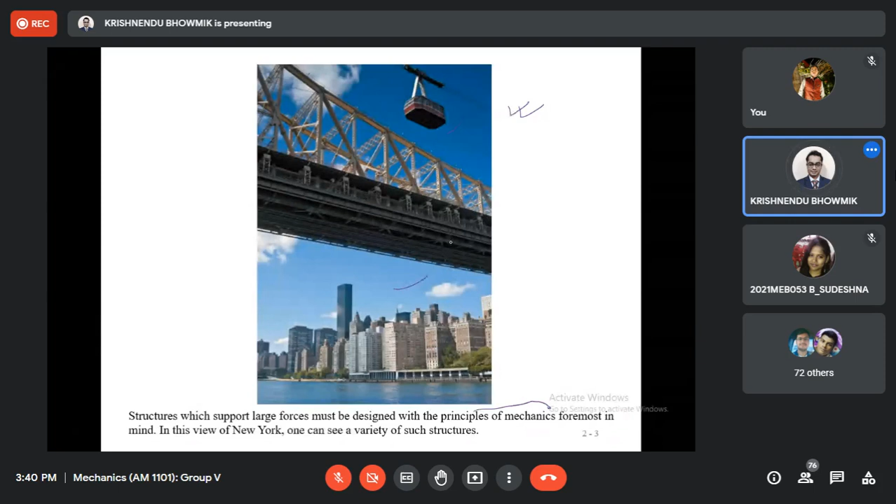So we are going to start day 1 lectures starting from statics. When we are talking about structures, this is one example of the structures. You can see this is based on a principle of mechanics, and this is one view of New York City, having various types of structural components. Okay, so lecture 1 starts with force, moments, and equilibrium. Okay, what is mechanics?

So to start with, in brief, mechanics is the science which describes and predicts the conditions of rest or motion of bodies. So there are two things: one is at rest and one is in motion. That will happen due to the action of forces. So mechanics can be briefly classified into rigid bodies, having two parts, statics and dynamics. That indicates this engineering mechanics is nothing but rigid body mechanics, and it has two parts: statics, the particle is at rest, and dynamics, the particle is in motion.

Then it might be deformable bodies. Another name could be solid mechanics; some people call it strength of materials. And then it might have fluid mechanics. Three main parts: rigid body, deformable body, and fluid mechanics. Or people say engineering mechanics, mechanics of solids or strength of materials, and fluid mechanics. And this mechanics is the foundation of most engineering sciences, and it is an indispensable prerequisite to their studies. Okay.

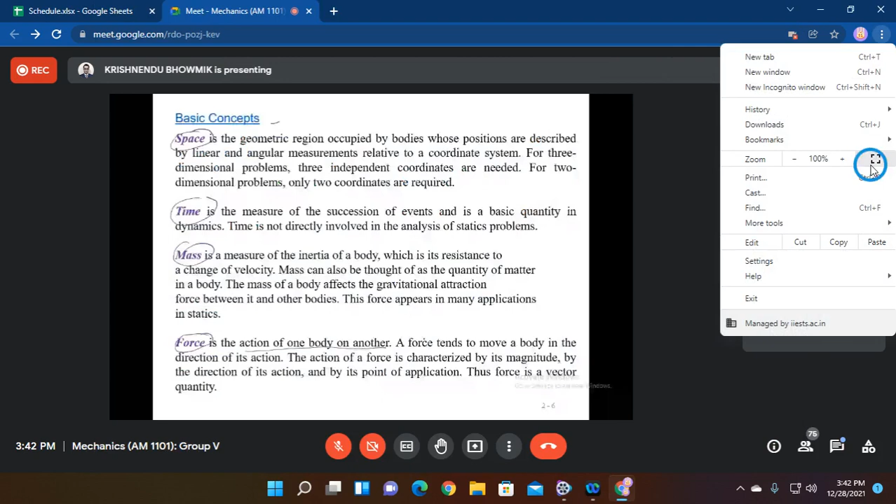Now, in basic concepts, we have space. You know what is space? Time, then mass, then the last one is force. Mainly, we will cover this portion, force, in this study. Force is the action of one body on another. Okay. And force is trying to move the body in the direction of its action. It tries, but whether it is capable or not depends upon the structure on which you are applying the force.

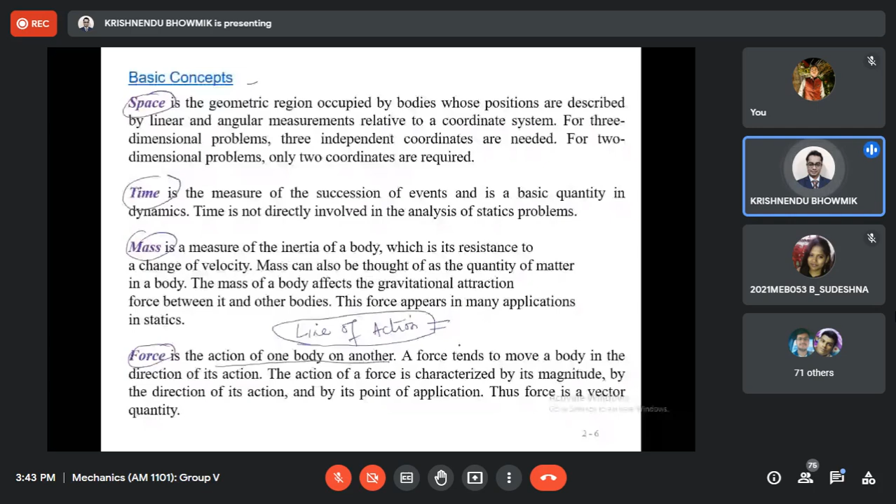So one important thing for force is what we call line of action. Force basically we apply through the line of action. Through the line of action. This is the most important word. Force has been applied through the line of action. Okay, and of course force has magnitude and direction, so we call it a vector quantity. Now next is when we are considering a particle. A particle is a body of negligible dimensions.

Yesterday we were talking about points, like it is having negligible dimensions. Different ways we can think about the points. Next is rigid body. A rigid body is where you are applying some forces on a body, but the body does not have any deformation. No strain developed in the body due to the application of the load. That is called the rigid body.

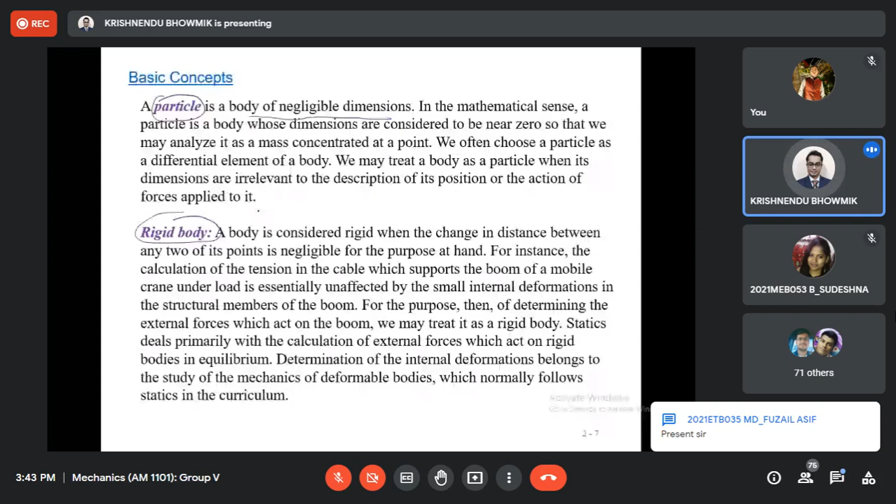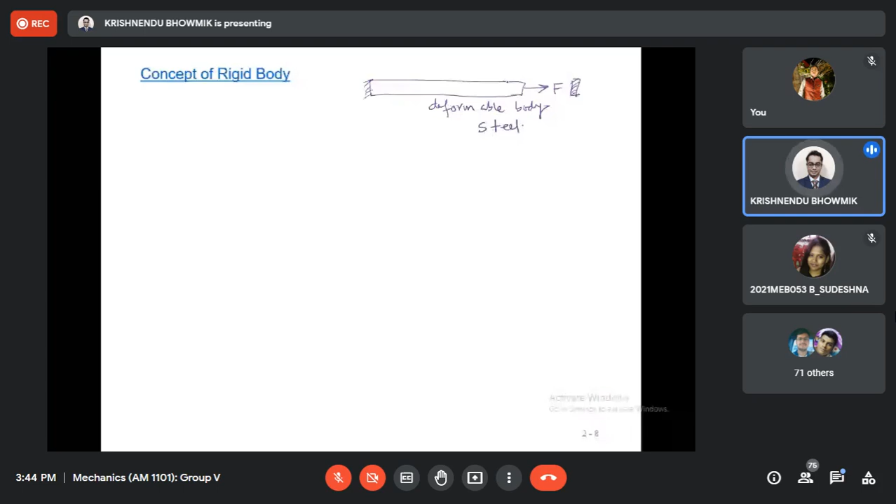So the concept of rigid body, maybe I'll give you very simple examples. Say I have one bar like this. I am applying some force here, say force F. This is the cross section, rectangular cross section. So consider this is a deformable body. Say for example, it is made of steel, like a scale kind of thing, metallic, made of stainless steel. We call it SS. Mild steel we call MS.

Now, due to the application of load, what we can expect: the length will elongate. I'm exaggerating the value. The elongated length is delta. Deformation, and also the cross section, like width, will decrease a little bit. So as a whole, the cross section is supposed to reduce. Maybe I'll draw this way. Cross section reduced.

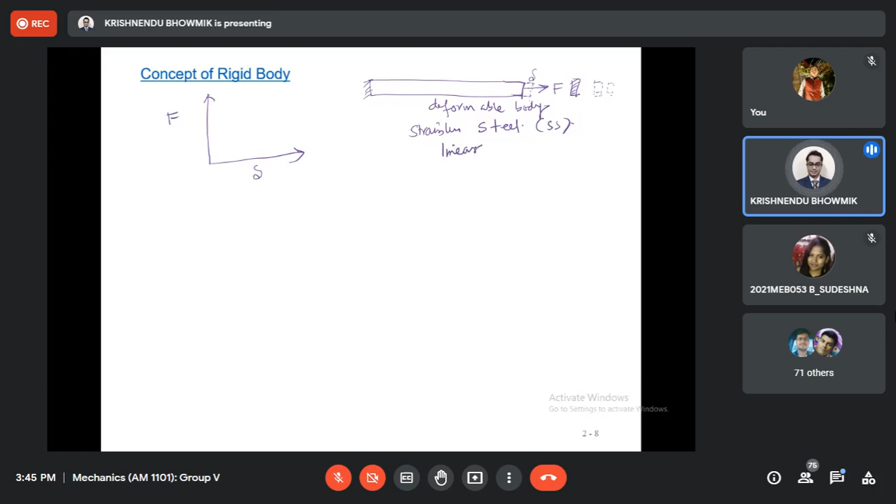Now I am interested to draw load F versus displacement, and I am considering the load is not much higher, and the response is linear. Now I have one open-ended question to all of you. It is just like y equals mx, correct? C equals 0, m is the slope. So m is nothing but tan theta. I am writing this as theta. Now, can you tell me what this slope represents? We always use it in engineering. What is this slope called?

Slope of the load-displacement curve. Gradient. Sir, differentiation. Very good. So like del F by del delta, the instant slope. Somebody can write it as dF by d delta also. Very good, one option. Any other option? Delta F by delta delta. Very good. Anything else? So tan theta is equal to F by delta. Very good.

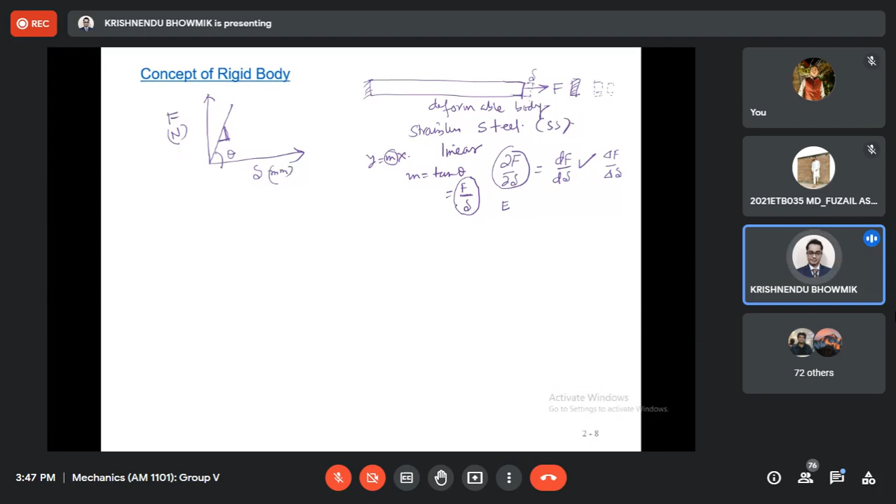F by delta. Now tell me, what do we term this F by delta? Stress. Young's modulus. Young's modulus, denoted by E. Okay. Anything else? Now tell me, this is in Newton and this is in millimeter. So this unit is basically Newton per millimeter. What is the unit of Young's modulus, if it is the Newton and millimeter system?

Newton per millimeter square. We call it MPa, megapascal, actually 10 to the power 6 Newton per meter square. Newton per meter square is Pascal, so we call it megapascal, MPa. But this unit and this unit are not matching, correct? So this slope cannot be Young's modulus. Anything else? Modulus of rigidity. What is the unit of that? That is also the unit of stress, 10 to the power 6 Pascal. But this is Newton per millimeter.

I am redefining this: force required to produce unit displacement. Sir, force constant. So where did you hear this name, force constant? In spring. Very good. So Hooke's law. Stiffness, K, spring constant. Somebody called it stiffness. Very good, I will use this word, stiffness. K is stiffness. Apart from the Young's modulus concept, everybody is correct.

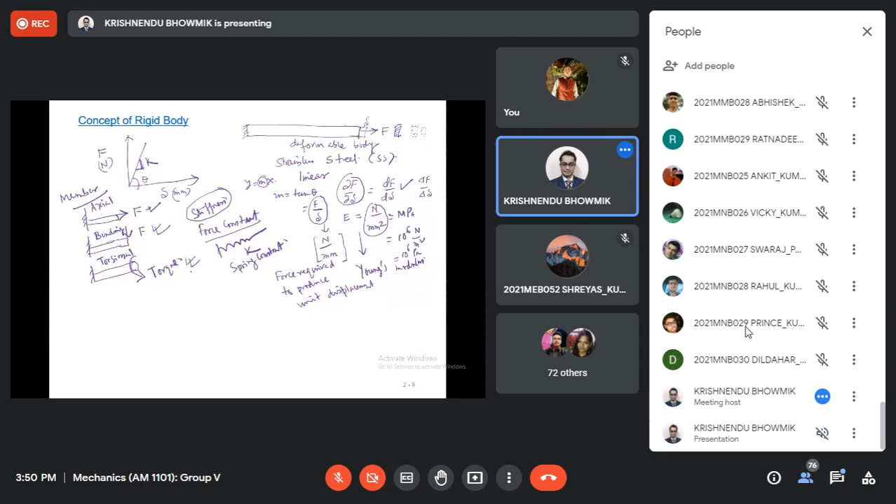Understood? I did the experiment and got this. Now the next idea is, here this cross section is A and maybe the initial length was L. So we are getting one strain, this is strain epsilon, that's it, delta by L. And stress sigma.

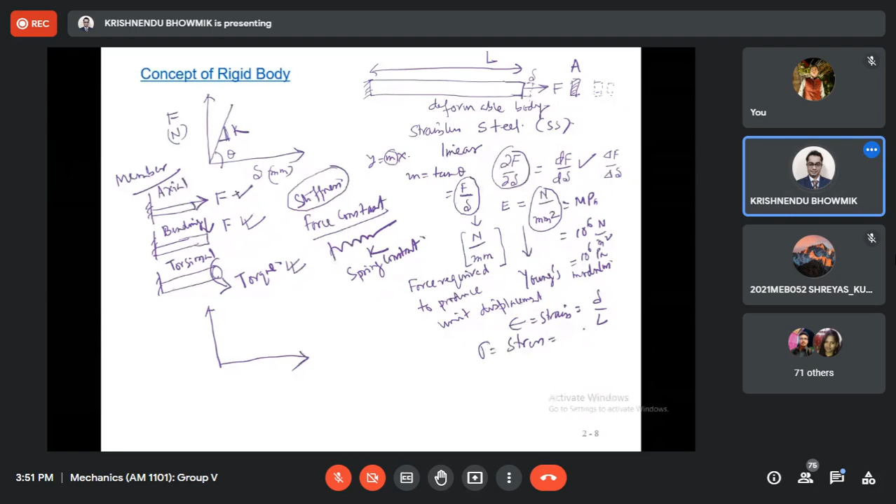A little bit updated version I am telling, but it is very interesting. Stress will be F by A. Now I am dividing F by A and delta by L, sigma and epsilon, so I am getting another graph like this.

What I did, whatever value I have from the experiment, what are we measuring? We are measuring load and displacement only, correct? Now if I divide this force by the original area, we call it the engineering stress strain curve. This is stress and this is displacement divided by length, so I am getting this curve.

Now tell me, which is this slope called? Young's modulus. Right, very good, you are correct. So basically in the experiment we are doing this, and if I apply the force, but we never put force on the horizontal axis, we plot force on the vertical. This is the force displacement concept of stiffness, actually the concept of stiffness and concept of Young's modulus.

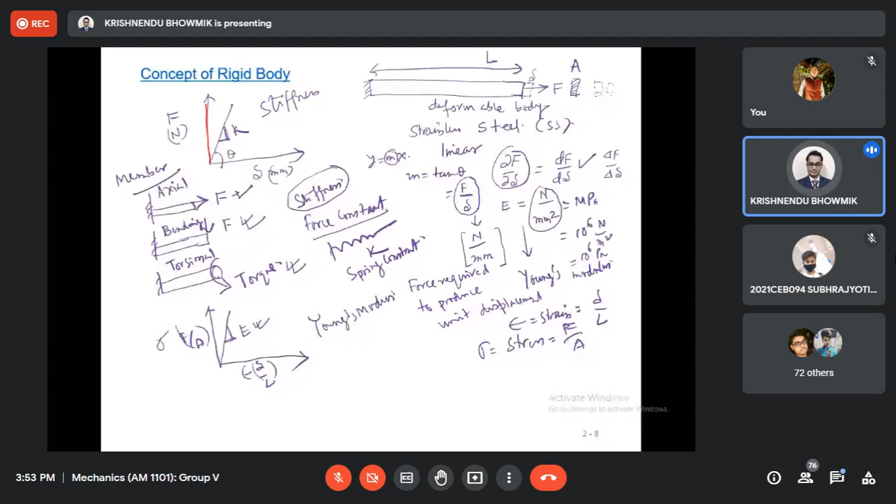Now, very interesting thing. So I am applying one load, but due to the application of the load, there is no deformation at all. If there is no deformation, but load we are applying, the curve is supposed to go like this, is it not? We are applying load, but no displacement, no deformation, then your curve should go vertically, correct? Strain also will be zero, it's supposed to go vertically, it should go vertically in that case.

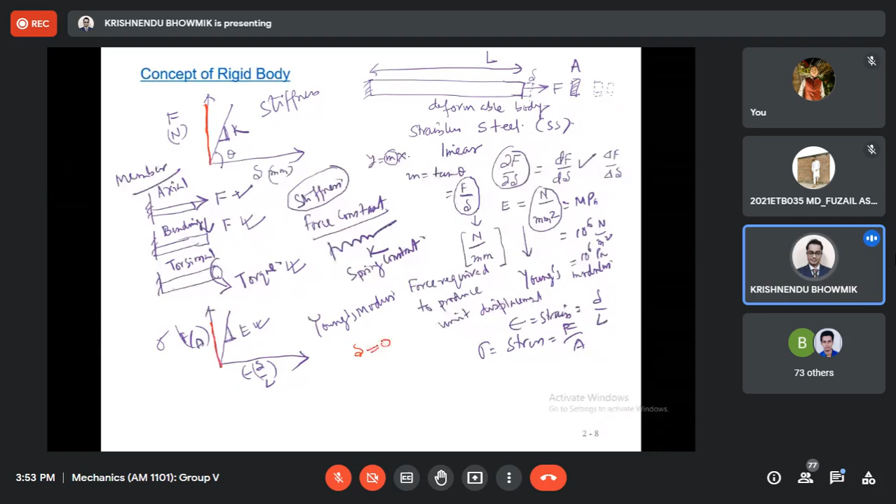When this displacement is always zero, no displacement, strain is zero, then the curve is vertical. That scenario means K is infinity or E is infinity, and that is called rigid body. You are applying some load, but there is no deformation at all in the body, or there is no strain at all, so it will go to the rigid body concept.

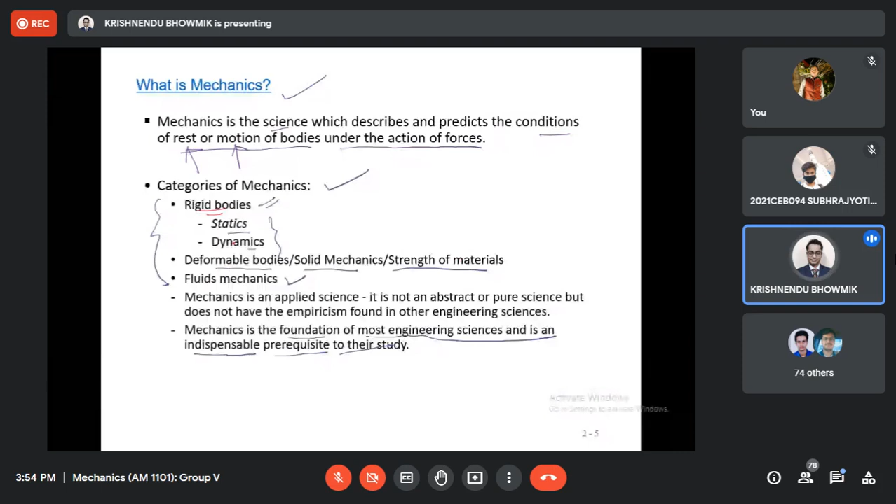Understood? The concept of rigid body has come from this. Yes, we have simplified the problem here. In mechanics, we will be doing the rigid body analysis, we will consider the body as rigid, so no deformation at all. But when it is deformable, we will go for mechanics of solids, or solid mechanics, strength of materials—same subject, different names. So that way we have defined the rigid body concept.

Now, last time I told you that elementary mechanics is mainly governed by 6 fundamental principles. So one is the parallelogram law of addition of forces—of course subtraction will also be included here.

Then the principle of transmissibility. Say it is a rigid body and this is the line of action. Now whether you are applying load here or here or here, if you are not changing the line of action, the effect of the application of the load on the rigid body will be the same. There will be no change at all in how the body will experience it. That formula is known as the principle of transmissibility. We can translate the force, or we can change the point of application of the load along the line of action. So that's why line of action is the key word here—we call it the principle of transmissibility.

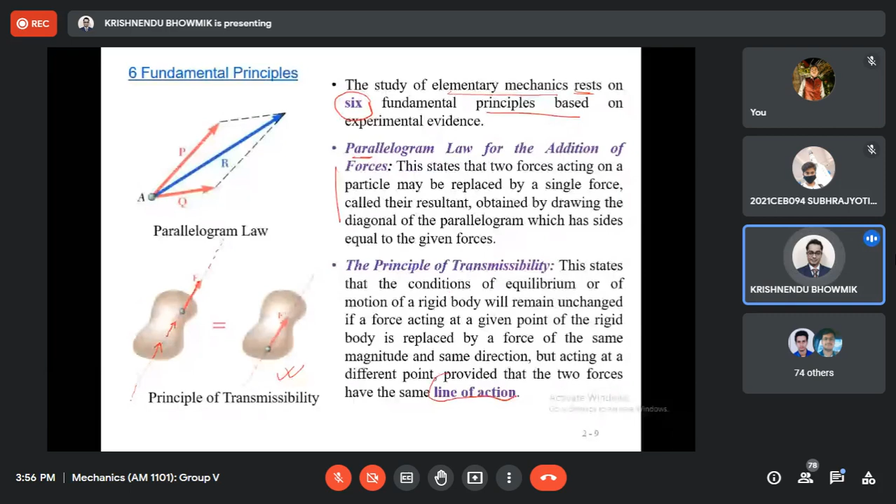Now, Newton's first law, second, third, and Newton's law of gravitation—these 6 fundamental laws, elementary mechanics will be based on.

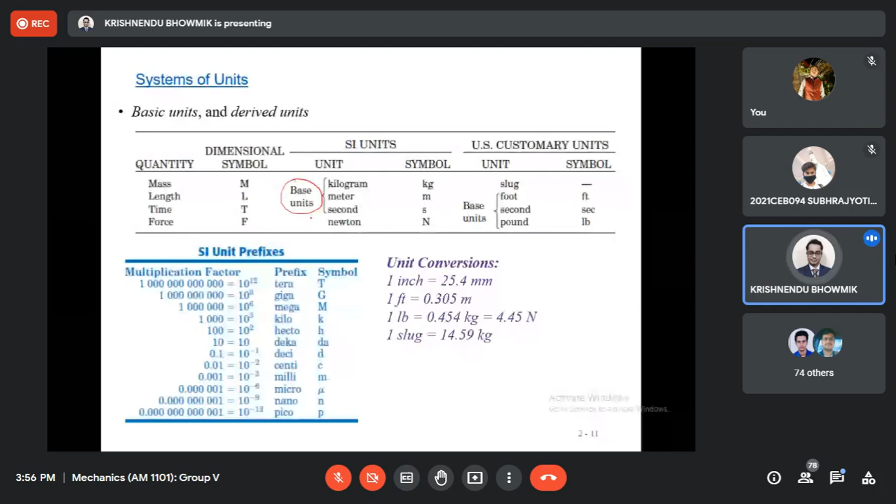Next I am moving to units. You know we have 2 types of units: we call one base unit or primary unit, and the other we call derived unit. Basic unit we call basic unit, the other is derived unit—you know mass, length, time are basic, and we can have many derived units.

Now we could have SI unit, FPS unit, CGS unit, and US customary units, where we measure foot for length, second for time, pound for force. And we may have some unit conversions like inch to millimeter, foot to meter, pound force to Newton or kg, or slug to kg, or maybe with some Newton—that you can easily do.

Now in the SI unit we have many prefixes. So we have started from meter—if I see this is the meter form, then deka, hecto, kilo, mega, giga, tera.

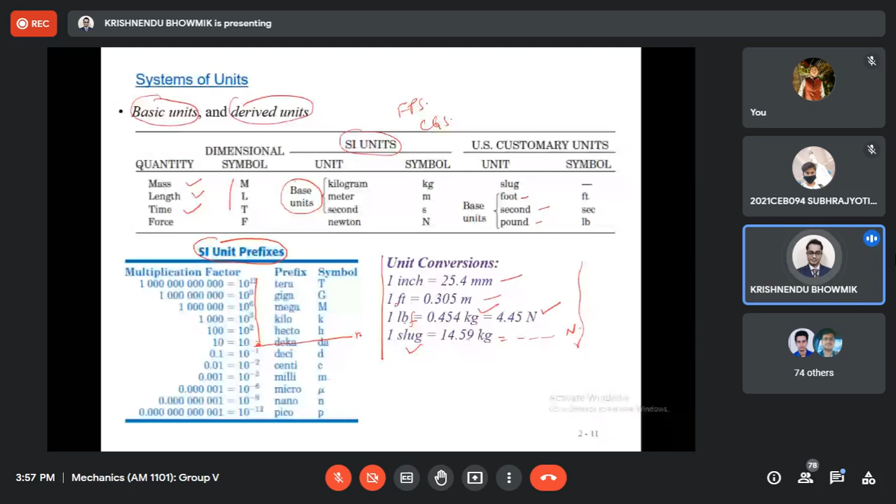So even I'm working on some of the work in carbon nanotubes. So those are nanotubes, nano level dimensions. Its diameter is around 8 nanometer or 7 nanometer for multi-wall carbon nanotubes.

Now the coming era will be pico, 10 to the power minus 12. Now if I say draw one point, you draw this or this — for you this is the point, dimensionless. But if you go for pico level, this is not a point, correct? It is having some dimensions. So it is relative.

But anyway, we will consider point as the dimensionless quantity. Whether you are drawing that one using your normal pen or something else, it differs, no issue. Okay, now once again, very common things — everything in 10 plus 2 standard you have read.

I am magnifying, using some magnifying glass. Say I have one magnifying glass, its magnification factor, say 10 to the power 12 plus, or 10 to the power minus 12. So I have a very big body, I can use 10 to the power minus 12 magnification factor. When I have a very smaller size body, I'll use some positive magnification.

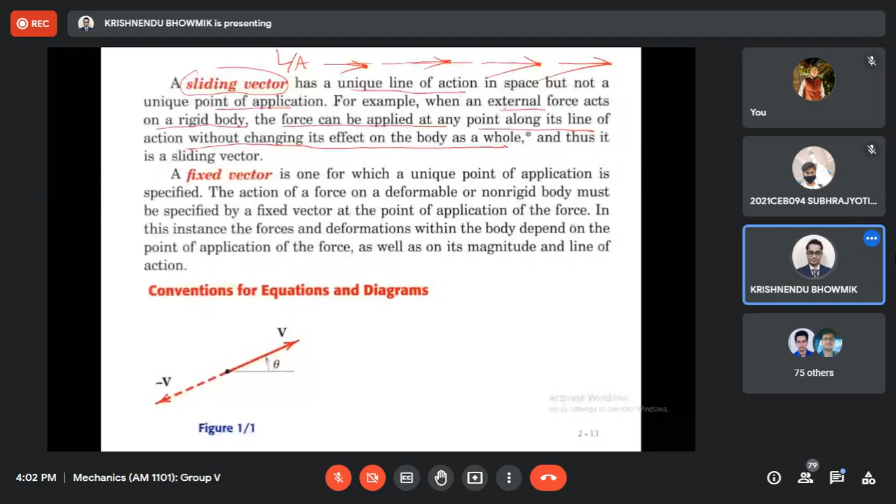So say if this is the point of application, I am changing the point of application — arrowhead is the point of application. Example: when an external force acts on a rigid body, force can be applied at any point along its line of action without changing the effect on the body, considering the equation. By which law can I move this? By law of transmissibility. Very good. Okay, now fixed vector.

Fixed vector is something where the unique point of application is important. For example, I have a mat or sponge. If I apply load here, and if I apply load here or here, on a very soft material, tissue kind of thing — do you think the effect will be the same?

No, sir — yes, you are right, so it will be different. So it depends upon the point of application. Point of application is also important. So that is the fixed vector.

Now let's go for convention of equations and diagrams. So generally we represent vector by its magnitude and direction, and maybe this is the horizontal, theta representing the direction, and if it is positive, v is the vector; so for negative vector, you know how we can write that.

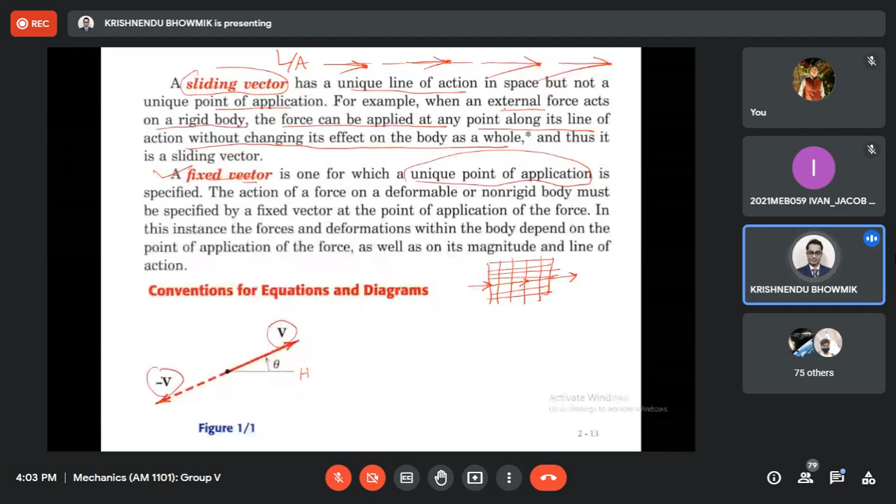Now when you are adding two vectors, we call it vector sum — using vector sum, not algebraic sum. But there will be some special cases, like if one vector is V1 and this is V2, then it is algebraic sum, correct? Or V1 and V2 in subtraction, it is algebraic sum. But that is a special case.

In any case, if I have two vectors, we have to go through the vector sum. It will be followed by the parallelogram law or triangular law. So you have to draw V1, V2, then you get this resultant by V1, V2 triangular law — this is the resultant.

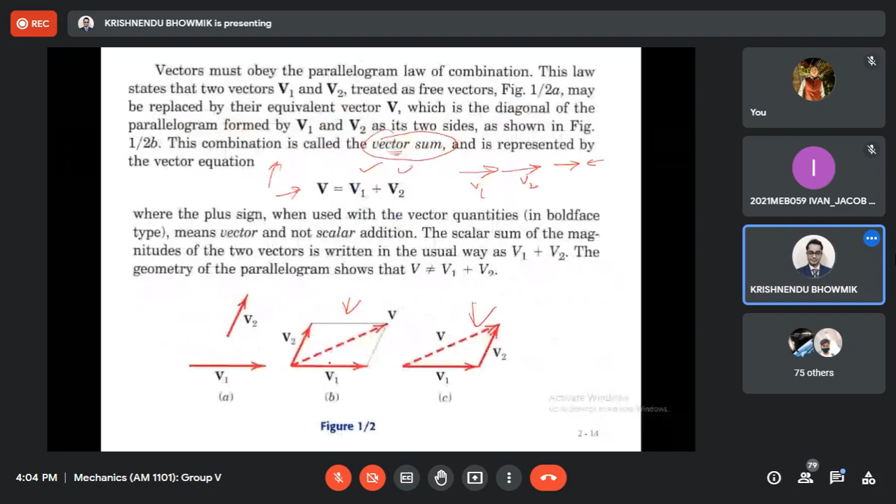Okay, when you want to subtract, like V1 minus V2, you can do it in a similar way. Now, we told that I have two vectors and I want to get the resultant, but suppose I have only one vector and I want to decompose it into two vectors. Let me give you a funny example.

Polygon law, maybe I can give you like this. I have this, this, this - say V1, V2, V3, V4, and this is the resultant R. If I can add V1, V2, V3, V4 and get this resultant R, why not consider that polygon law is nothing but summation of many triangles? This one vector can be decomposed into many vectors. Possible, correct? If I can add everything, then one vector can also be decomposed.

Now decomposing, a very simple one. One vector I want to decompose into two directions, but here theta is not equal to 90 degrees. But it may have 90 degrees also here, coordinate x and y. You recall this - here x coordinate, y coordinate, so they are orthogonal, 90 degrees to each other. So I can have this type of decomposition of the vector also: two parts, Vx and Vy, along x and y directions.

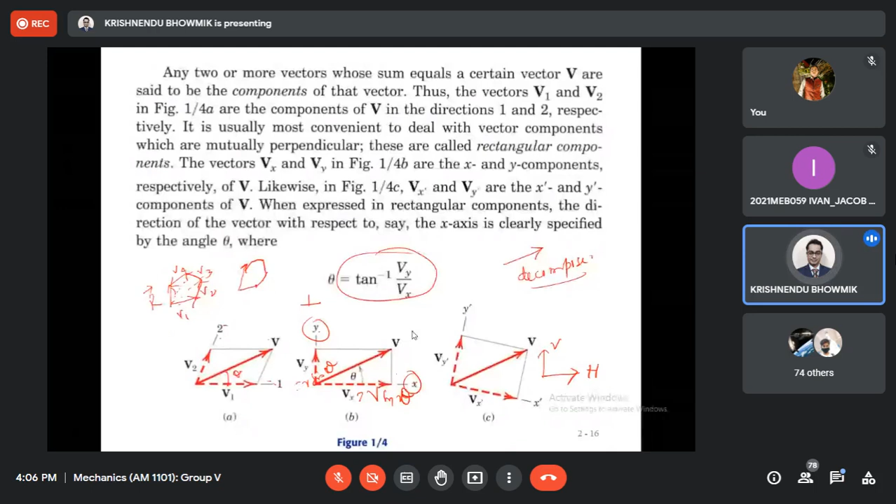That x component is V cosine theta, Vx equal to V cosine theta, and Vy equal to V sine theta, and theta is governed by this. V is the resultant, or we have V as the original vector, which we have decomposed into two here.

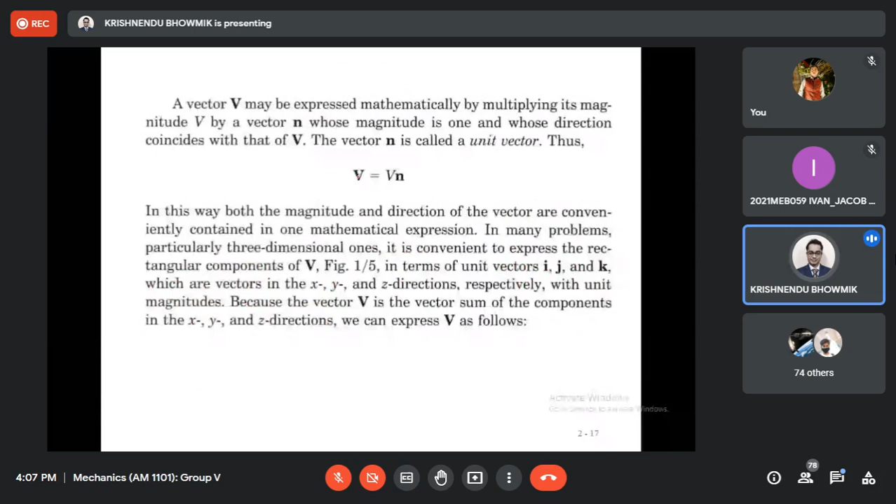For the three-dimensional case also, we can consider the unit vector concept. Say this is the one vector V, having I, J, K - 3 unit vectors along x, y, and z, 3 orthogonal planes. I'm talking about 3 dimensions - in short, we write 3D; 2-dimensional we write 2D. So this V we can decompose into Vx, Vy, Vz, 3 components along x, y, z, and I, J, K are the unit vectors. So basically V is governed by these expressions.

Now theta x is along x, theta y along y, theta z along z. If somebody considers L equal to cosine theta x, M equal to cosine theta y, N equal to cosine theta z, then we can rewrite the V vector as Vx equal to LV, Vy equal to MV, Vz equal to NV, and V square equal to Vx square plus Vy square plus Vz square.

How can we get this? Very nice - first of all we will consider x, y, and we will get this resultant. Let me change the color. So this is the resultant, presented with a double arrow. So this is resultant 1, R1.

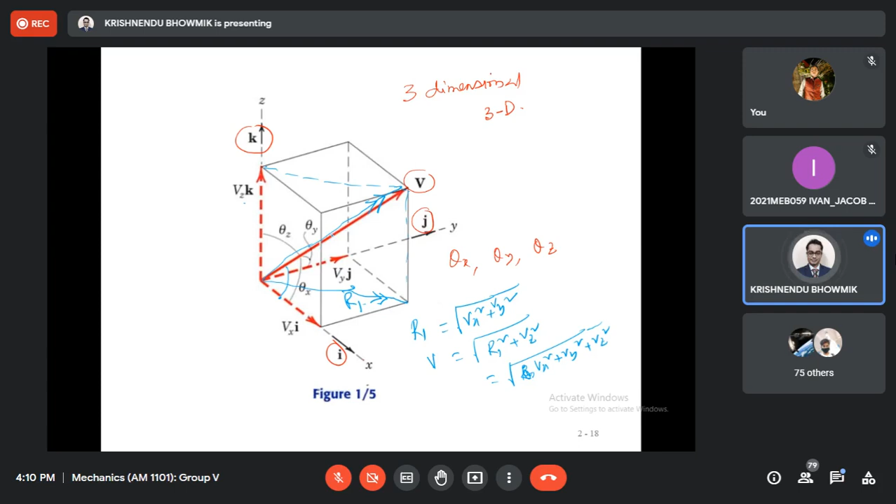So that's the way you get this. Similarly, if you put Vx equal to LV, Vy equal to MV, Vz equal to NV, then L square plus M square plus N square equal to 1. L, M, N are nothing but the cosine components along the x axis, y axis, and z axis - cosine theta. This is the resultant with x, this is the resultant with y, and this is the resultant with the z axis.

Now, very important: consider L equal to M equal to N, all the same - that means theta x equal to theta y equal to theta z. That indicates V is aligned such that it makes an equal angle with all x, y, and z coordinates. Then L square plus M square plus N square equal to 1 will give L equal to M equal to N equal to square root of 1 by 3. And if you calculate this, let me check... square root this... just wait.

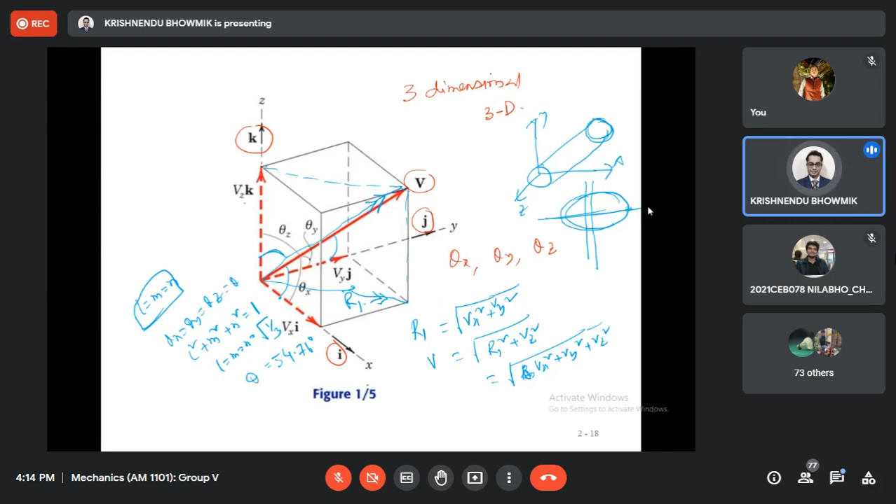Only I have one magnifying glass. That magnification factor is different, that's all. Okay, so we are here.

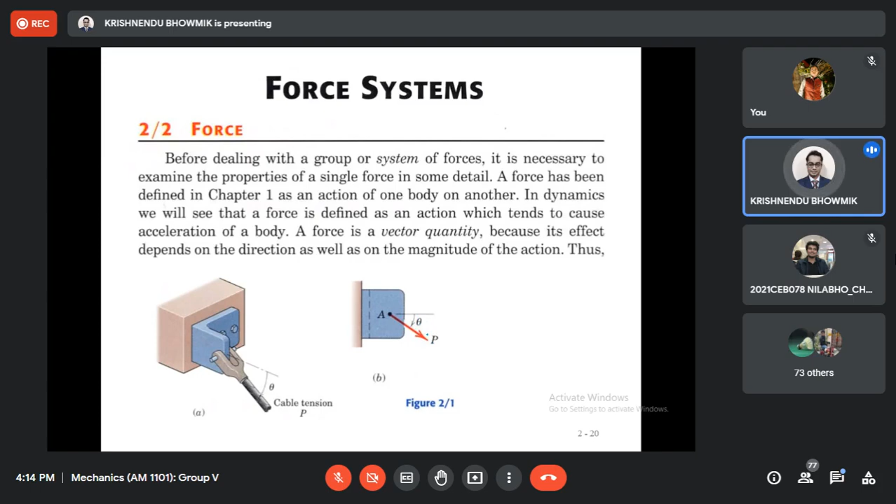Now next is force. We already told force means it is a vector. Say this is the structure, we have applied one force here, having some horizontal component, some theta, we can have this force resolved into components like horizontal, vertical, and many more, and it is a vector quantity.

Now there are two types of force: one is external, another is internal. There are two effects: one is called external, the other is the internal effect. Let me show you a very interesting thing.

Say I have one mass m, or maybe weight mg, suspended from a cable. Now I want to draw a cut here. If I cut here, it will be mg and there will be some tension T here. Initially this is undergoing some T equal to mg, from vertical balance we will do equilibrium.

I'll come to that later, but you understood this is T equal to mg. Once again, if I consider these portions, so only this, then also it is T and T. Very interesting is that it is external force we have applied, this mg, some external force, but this cable is having some tension under it, that is T.

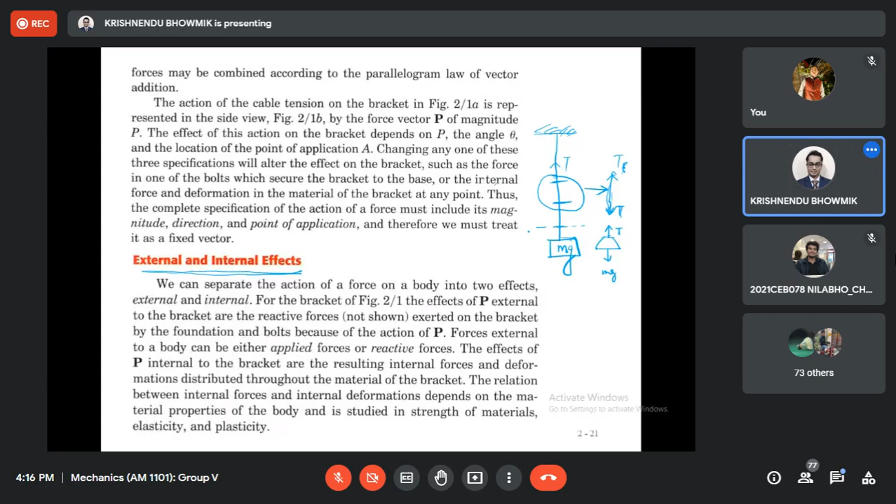Whatever I will cut, initially it was internally acting. Those will be exposed to the atmosphere, and it becomes external in that case. If I highlight this, and this is the portion, initially everything was internal, but when I cut here, an imaginary cut, then these internal forces become exposed externally, and I want to represent them by some force T. We'll come to that later also.

Principle of transmissibility already told. Force classifications: force may be contact force, it may be body force. What are the body forces? Centrifugal force, weight, those are the body forces. What are the contact forces?

When there are two parts in contact, and we have applied the load, through the contact definition, load will be transferred from this body to this body, body 1 and body 2, due to the contact. We may have some point, we can apply the load at a point also, that is concentrated force, or maybe force can be considered as force per length.

Some force per length. Say we have a brick wall. If I consider one wall with brick, thickness is always the same, say a 5-inch or 10-inch wall. I consider that due to the brick or the roof, the force applied on the brick, I want to consider per unit length. Or maybe I have the total roof, or consider an airplane with some skin. On the skin there are aerodynamic forces acting, and we convert that force per unit area, which we call pressure.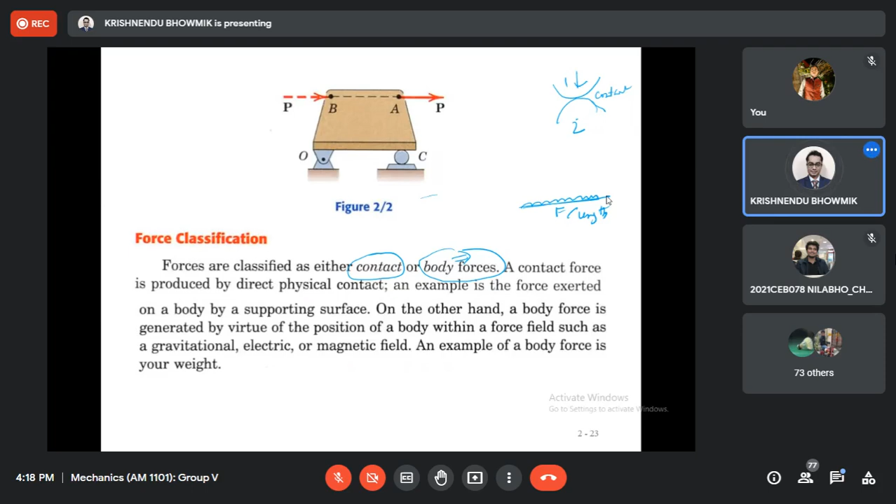So that force can be contact type, maybe contact force, body force, point force, line force. What is line force? Per unit length. What is distributed force? Per unit area. Of course, body force is also distributed over the entire body.

Then, as I told, there are action and reactions, Newton's third law. Now next is concurrent force. Concurrent forces are when those forces are passing through a particular point. F1, F2, they are passing through one particular point. That's why we can have the resultant using the triangular law or parallelogram law.

Now, instead of concurrent force, there could be some other type of force also apart from the concurrent force. Let me explain a little bit for your better understanding.

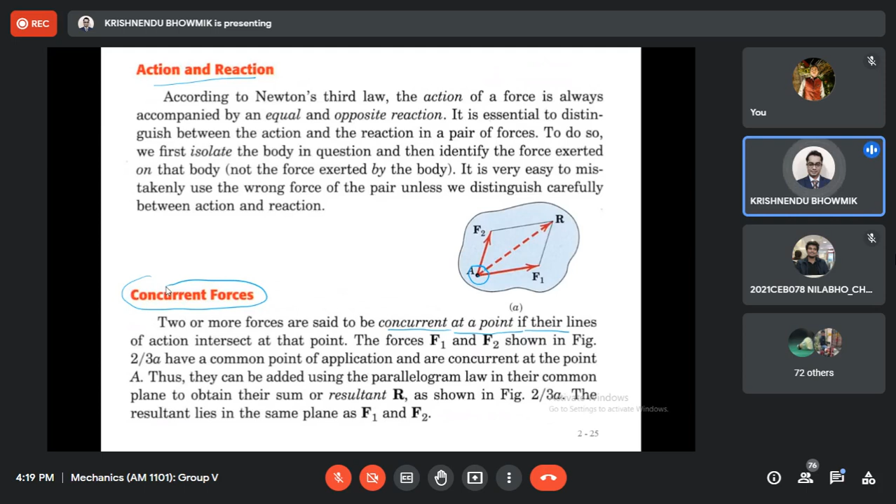First about force system. Force system is a collection of forces or group of forces acting at some specified locations of the body, and that force system might also include couple or torque, which I will come to later.

Now there are very particular points like collinear and non-collinear. Collinear means lines of action are the same, so these three forces are collinear. What are non-collinear forces? Lines of action are different.

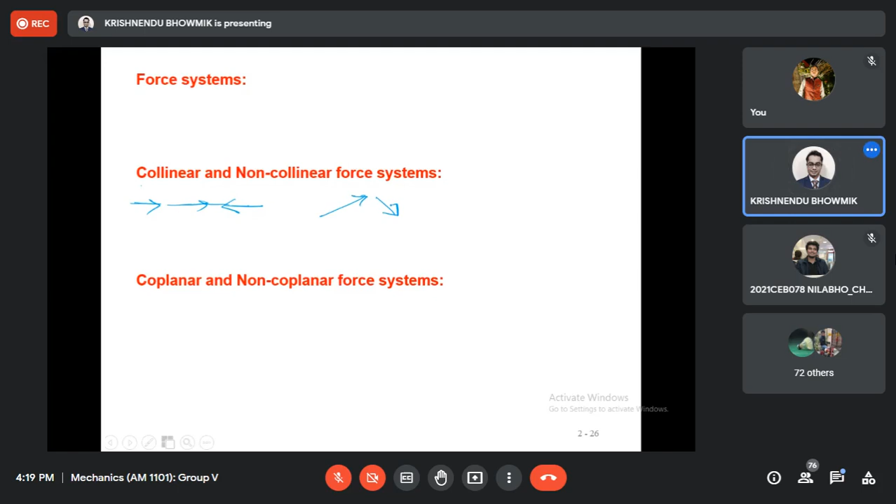Collinear, non-collinear forces. Now coplanar and non-coplanar forces. So I have to draw one plane. There are some forces like this - this is a coplanar force. Non-coplanar forces means I have drawn here two different planes.

Sorry, handwriting is not good because of writing online using a graphics pen, a mouse basically. It's enough, you are writing well, yeah good.

Thank you. So now these are the forces here, and these are the forces here. This is non-coplanar because this set is coplanar, this set is coplanar, but taking this and this together, it is a non-coplanar force system.

Next is concurrent and non-concurrent. As I told, concurrent forces - so this is the point, and lines of action are such that they are meeting here or moving away from that particular point. Non-concurrent means they are opposite, not meeting at a point.

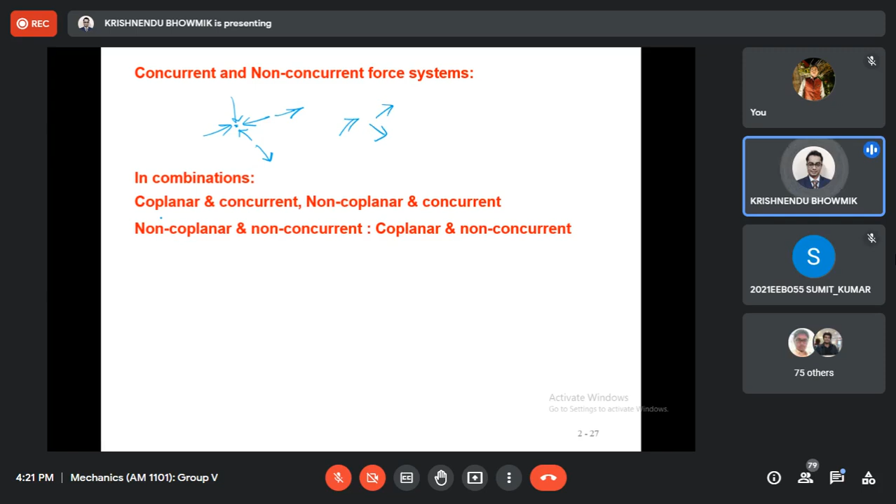Now I want to use the combination of everything - coplanar and concurrent. This is the plane, and concurrent. Coplanar and concurrent. This is non-coplanar and concurrent. How is it possible? Yes, it is possible, let's draw here.

This is the brick shape, hexahedral, and forces are such that this is one force, this is another force, and this is another force - F1, F2, F3. They are non-coplanar but concurrent. Now non-coplanar and non-concurrent.

That can be drawn like this. This is non-coplanar, non-concurrent. Now coplanar and non-concurrent - the plane is the same, but non-concurrent. So these are the ways we can have different types of force systems.

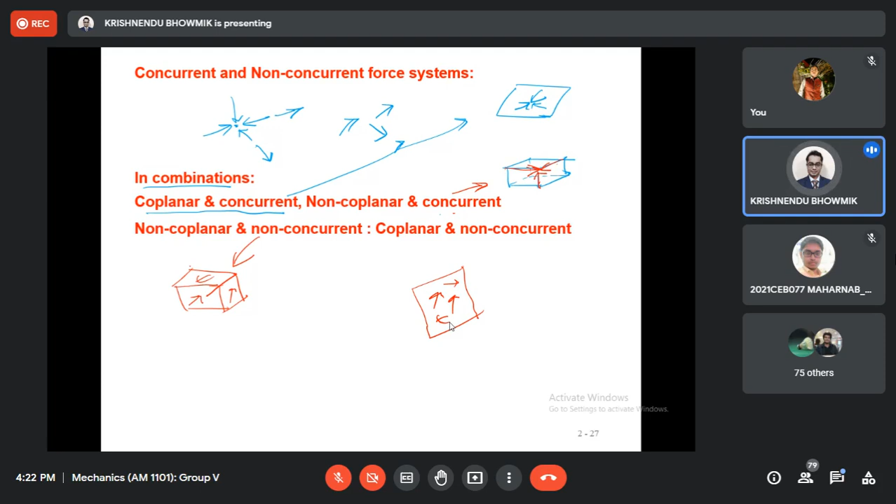But the very nice or easy one is coplanar, and also concurrent. These two are easy because we can easily get the resultant for that case.

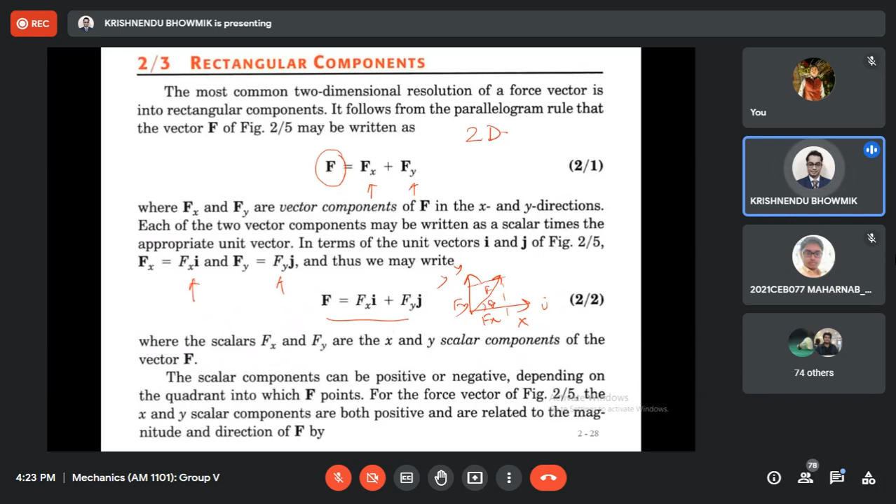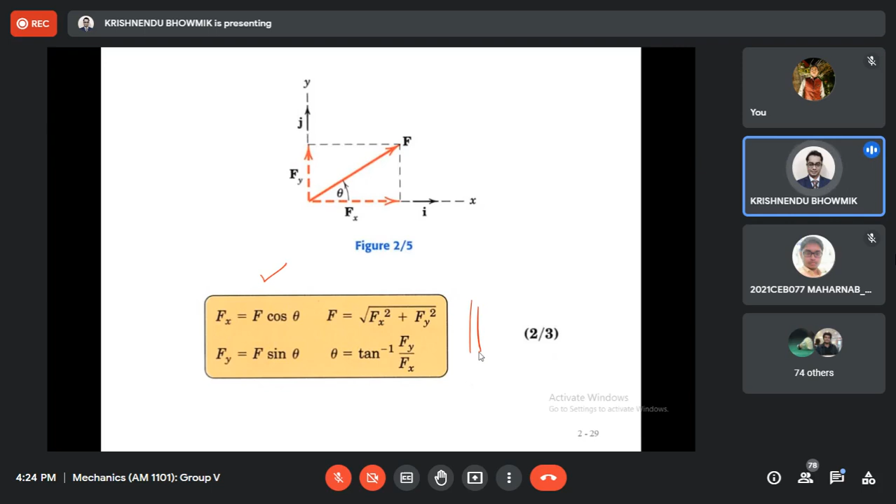Now, yes, here it is shown. So we know F equals this - Fx equals F cosine theta, Fy equals F sin theta, and this is the result. It is very simple because we have decomposed the force into Fx, Fy, and everything is coplanar, and coplanar and concurrent.

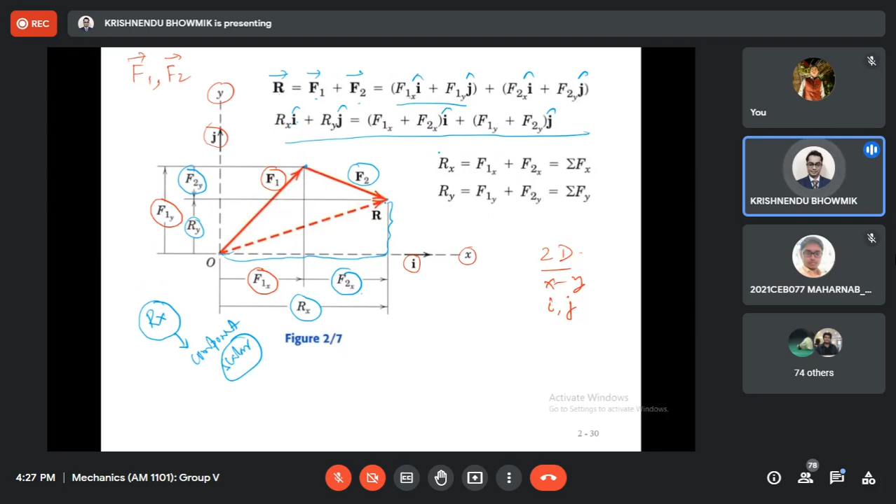Okay. Now you have to recall this Rx. This is the scalar component. Similarly, Vx, F1x component. These components are scalar quantities. That's why this scalar is multiplied by the vector. So if I decompose this way, I can see for i, Rx equal to F1x plus F2x equal to summation Fx. It may be plus, it may be minus, algebraic sum, because these are the components.

Rx and Ry are the components. That's why Ry equal to F1y plus F2y, summation Fy. As these are the components, this is the algebraic summation. It may be plus, it may be minus. You have to be very careful when you write V equal to Vx i plus Vy j, these are scalar. As these are scalar quantities, these are the algebraic sums. Summation Fx, algebraic sum. Summation Fy, algebraic sum.

So when you are considering summation Fx and Fy, you must represent x and y. Sometimes students didn't draw x and y and just wrote summation Fx, summation Fy. As the examiner, I cannot understand, because somebody might have this as x and this as y, somebody may consider this is y, this is x. You should not always say horizontal is x or vertical is y. Horizontal should be represented by capital H, vertical by capital V, or else x and y need not be horizontal.

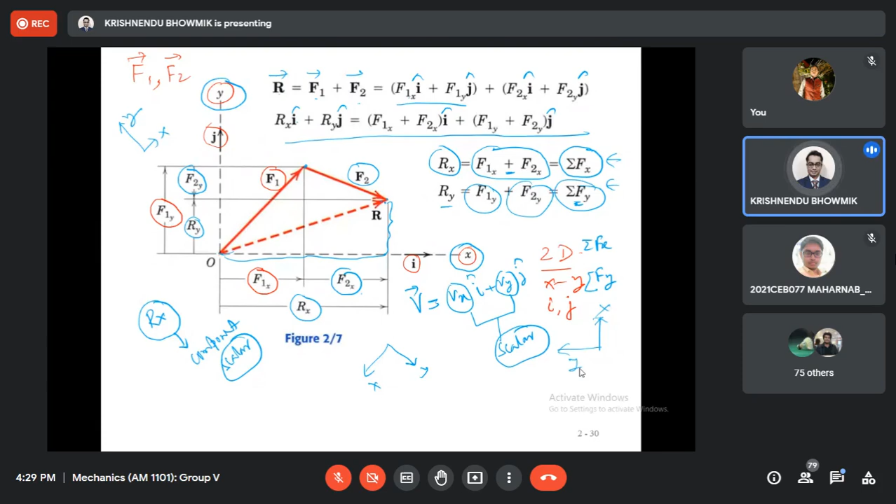It may be inclined in any direction, but up to 10 plus 2 standard, you have the convention that x is always horizontal. No, in engineering, x is not always horizontal. Understood? X may be vertical also. Nobody can stop me if I write this is x and this is y, because it is my intention. I am defining the x and y coordinates. No way it will be always horizontal. Only H stands for horizontal, V stands for vertical. That is for sure.

Done. Next, let's solve one problem. Okay, just a minute. Give me 1 minute.

Okay, students. Now, next, here one example we can discuss. Combine the two forces P and T in this figure, which act on the fixed structure at B, into a single equivalent force. So roughly there are two forces, P and T. You have to combine these two into a single force, the resultant. The resultant is supposed to have some magnitude and direction, as it is a vector. There are many ways we can solve this problem.

One is called graphical solution. A graphical solution will use a scale. Say for example, 800 or 600, there are two. Somebody can use 100 pound equal to 1 inch in scale. Then you have to draw 8 inch and 6 inch. So you have one plain paper, and you can check whether in that paper 8 inch and 6 inch can be accommodated or not. Sometimes it may be difficult.

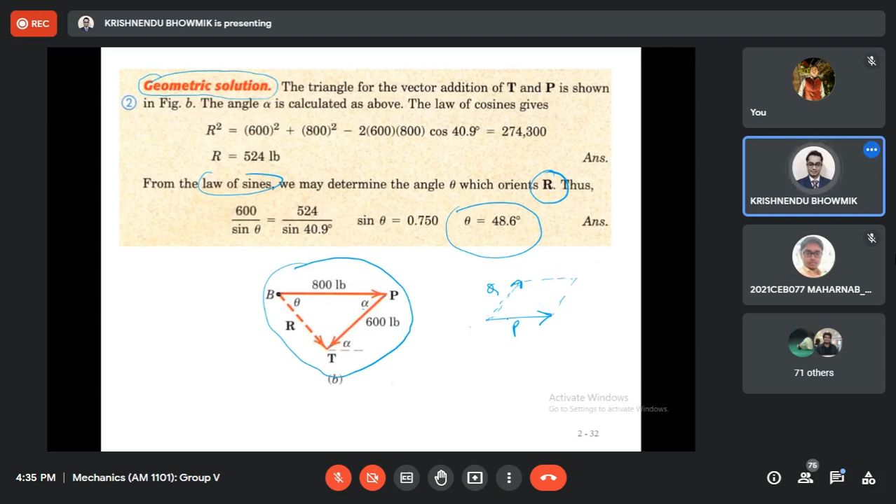But unfortunately here the scenario is different. Here this P is along this, sorry, this one like this. So I'll draw like this, and this will be the resultant, correct? One minute. This is the P and this is the direction. So this will be here. This will be T, I guess. And this way it acts, then this will be the governing equation to calculate the R value. Then you will get this R, you will get this theta. First was graphical, then it was geometric solutions.

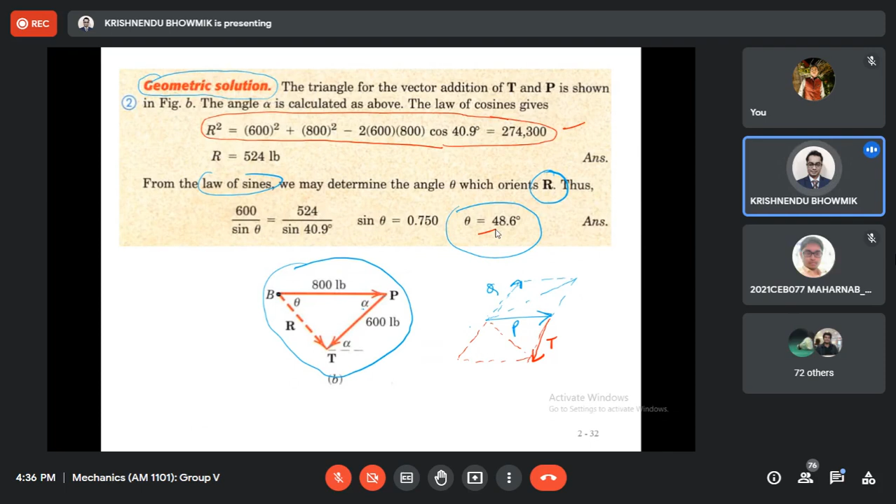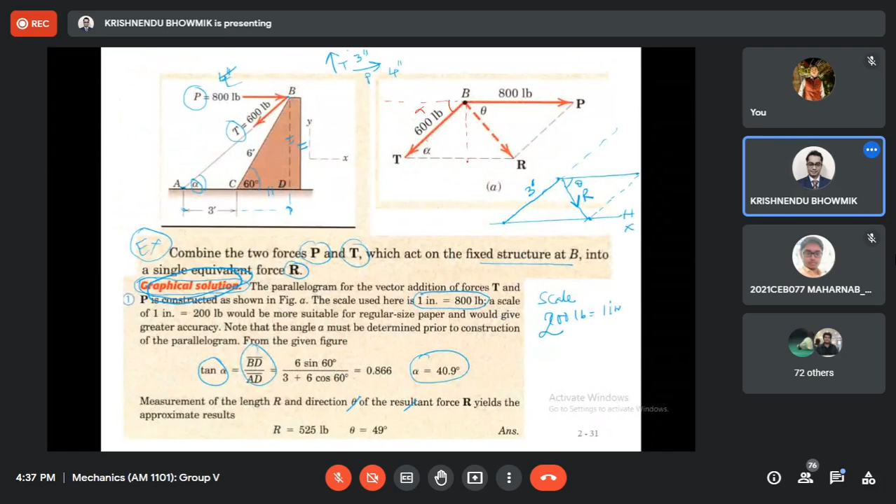Next is algebraic solutions. I want to write Rx, Ry, R, that concept. Rx equal to sum of Fx, provided you give X and Y correctly. Rx you can get this value 800 minus 600 cos alpha, this is alpha. Ry will be, there will be no component of P along this direction, so it will be T sine alpha with a minus sign. So these are the two values, and resultant is this and theta is this. And then somebody can write R equal to Rx i plus Ry j in vector form. And this is the solution.

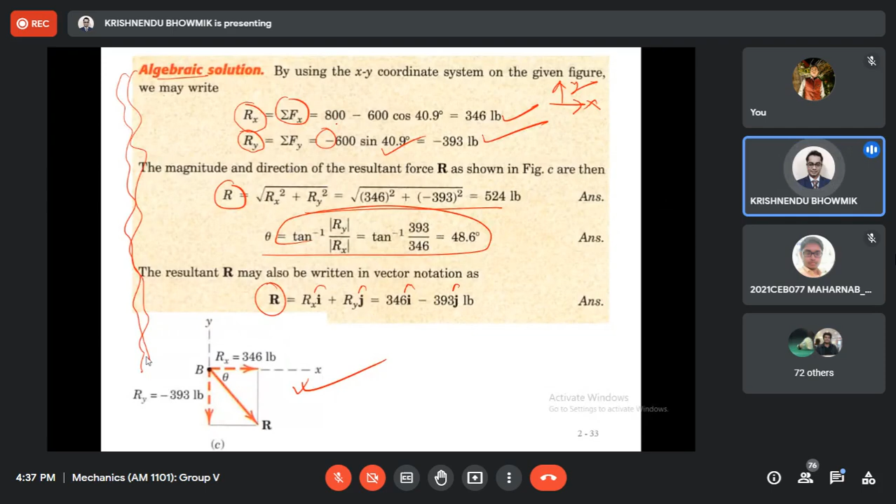I believe this algebraic sum is maybe a little bit new, but we will follow this. Because when we talk about equilibrium, we will put summation Fx equal to 0, summation Fy 0, summation Fz 0, in 3 dimensions. Mx, moment around x, 0, My equal to 0, Mz equal to 0. So that way we will move. So one option we will always follow here, that is algebraic solutions. Now next is moment.

Excuse me, sir, can you please give us a 10-minute break? It's tough to stay on screen for so long. Yes, sure. You should tell. Very good. So now it is 4:38, so you join at 4:50. But this recording will be on, because I'll stop at the end. Thank you very much for telling this, because for me, I've been studying this for 20 years, for you it's new. I'm using a higher magnifying glass. Actually 12 minutes break. Sharp 4:50. Okay, yes, sir.